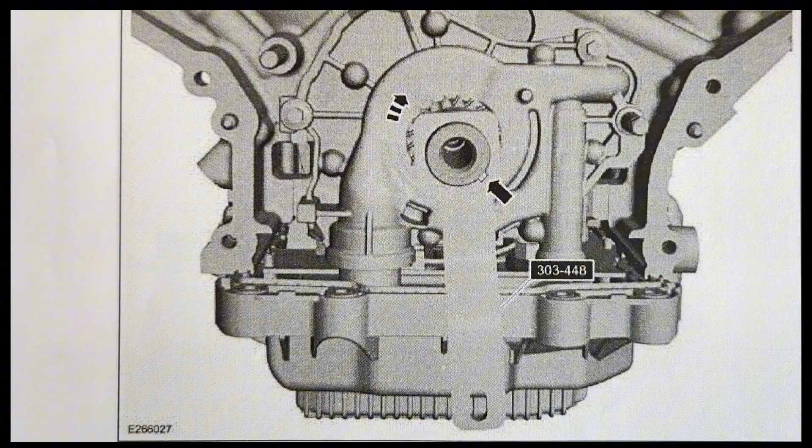Using the special tool, rotate the crankshaft clockwise until the keyway is at the 5 o'clock position.

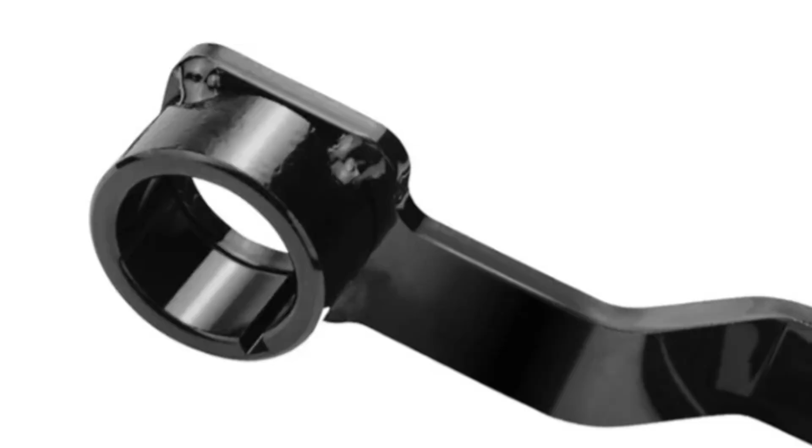That tool is 303-448, and it's called a crankshaft holding tool. The tool from Ford retails for $154.58. The aftermarket version retails for $79.99. The same tool's available through Amazon for $11, which is the one that I bought. But it needs to have the powder coating removed from the part inside that slides over the crankshaft, or else it'll never fit.

Starting with the driver's side cylinder head, assemble the hydraulic lash adjusters onto the spring clips on the camshaft roller followers. Lubricate the camshaft roller follower and hydraulic lash adjuster assemblies with clean engine oil. Install the camshaft roller follower and hydraulic lash adjuster assemblies.

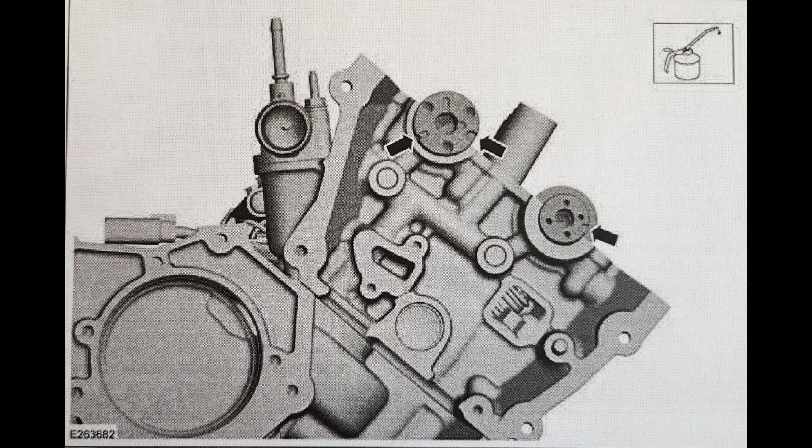Then install the intake and exhaust camshafts in the neutral position and align the D slots as shown in the illustration.

Install the camshaft bearing caps and bolts, but don't tighten them at this time. Install the front mega cap and bolts. Do not tighten at this time as well.

Following the torque sequence shown, you're now ready to torque all the cap bolts, starting at stage 1 at 53 inch-pounds, and then stage 2, turning each one 45 degrees.

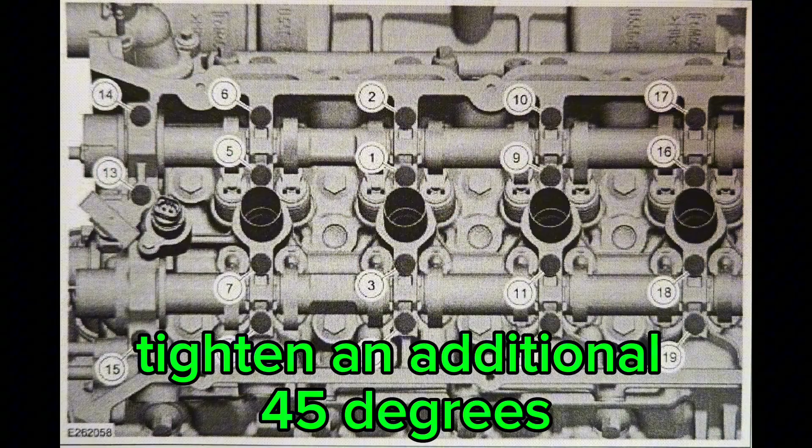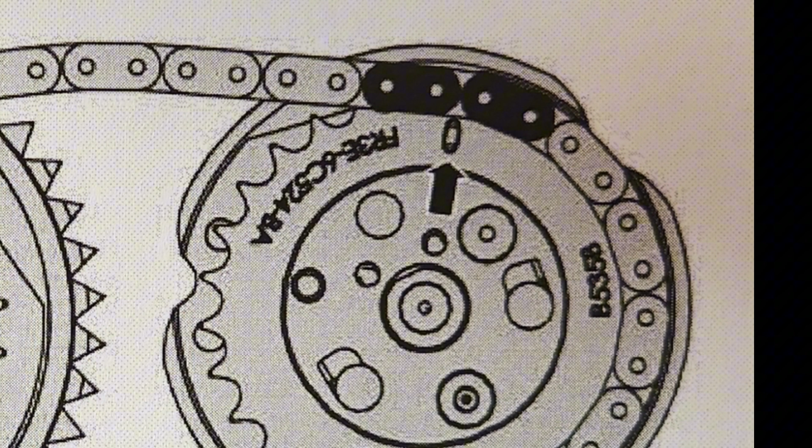Position the secondary timing chain onto the VCT assemblies. If you're using cam lockouts, the procedure is still the same. Align the colored links on the secondary timing chain with the timing marks on the VCT assemblies as shown in the illustration. The timing marks on the intake VCT assembly should line up between the two consecutive colored links. The timing mark on the exhaust VCT assembly should align with the single colored link.

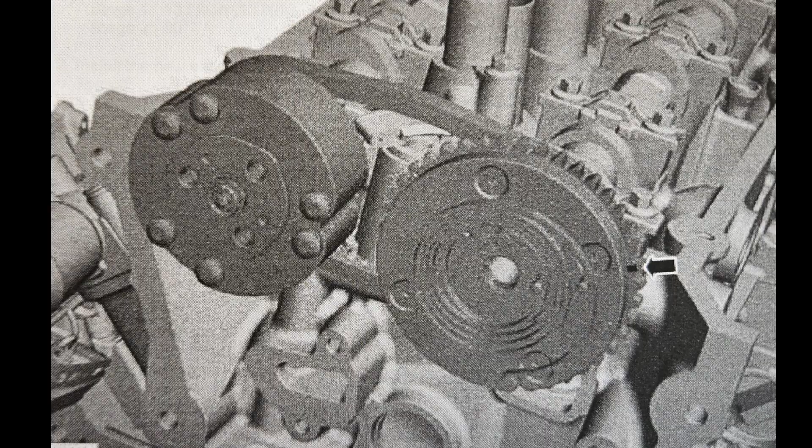Install the VCT assemblies and the secondary timing chain onto the camshafts with the timing mark in the position shown in the graphic. It may be necessary to rotate the exhaust camshaft slightly using a wrench on the flats of the camshaft to seat the VCT assemblies onto the camshaft.

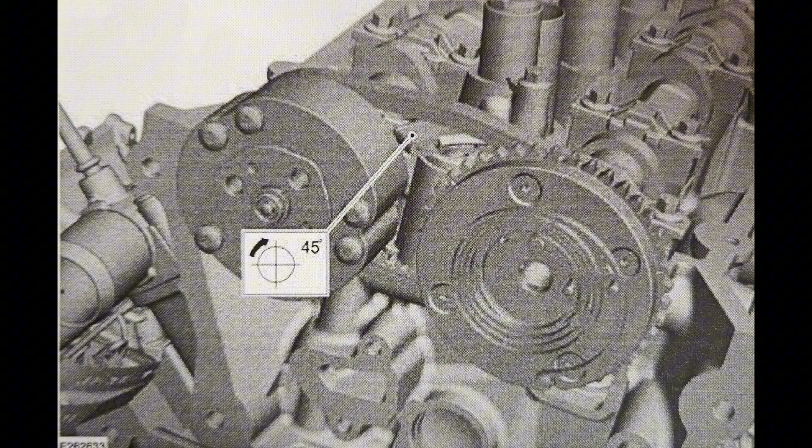Rotate the secondary timing chain tensioner clockwise 45 degrees so the ramped area is facing forward, and fully seat the VCT assemblies onto the camshafts. If the secondary timing chain is not centered over the tensioner, reposition the VCT assemblies until they're fully seated on the camshafts. Use a wrench on the flats of the camshaft to hold the camshafts in position while tightening the VCT assembly bolts.

Install the new intake VCT assembly bolts in the following procedure. Stage 1, torque to 133 inch-pounds. Then stage 2, rotate them another 90 degrees.

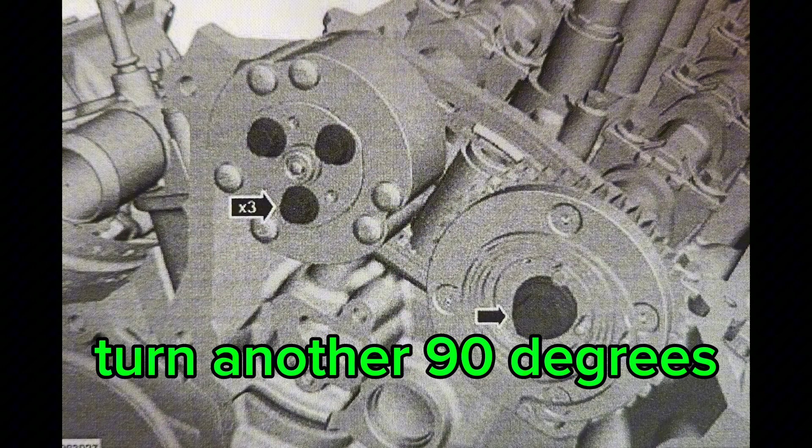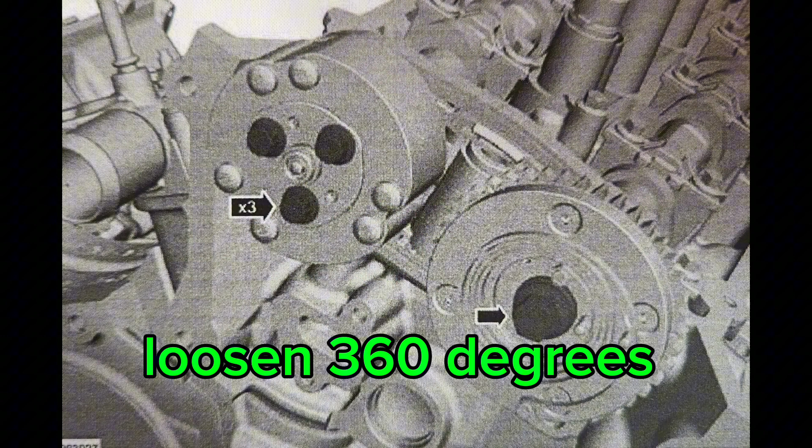Install the new exhaust VCT assembly bolt and torque as follows. Stage 1, 30 foot-pounds. Stage 2, loosen 360 degrees. Stage 3, 30 foot-pounds. Stage 4, rotate the bolt 90 degrees.

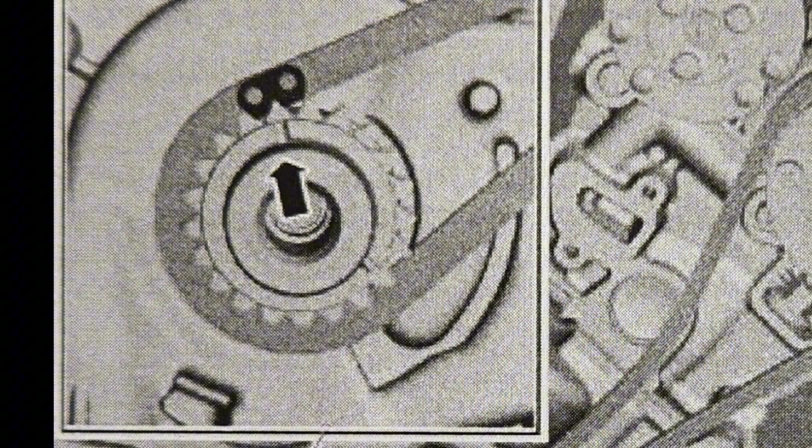Install the left hand or driver's side timing chain. Align the colored link on the timing chain with the timing mark on the left hand VCT assembly. Align the remaining colored link on the timing chain with the timing mark on the crankshaft sprocket.

To install the left-hand timing chain guide, it may be necessary to rotate the crankshaft slightly to provide enough slack to install that guide.

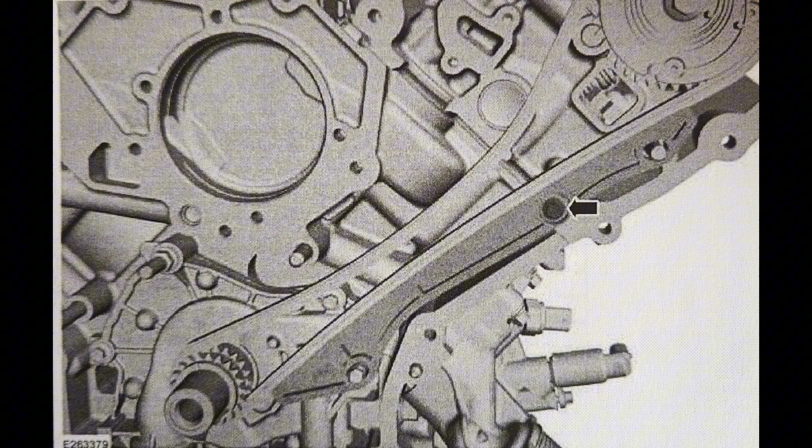If rotating the crankshaft is necessary, be sure to return the crankshaft keyway to the 5 o'clock position after installing the left-hand timing chain guide. Tighten the attaching bolt to 89 inch-pounds.

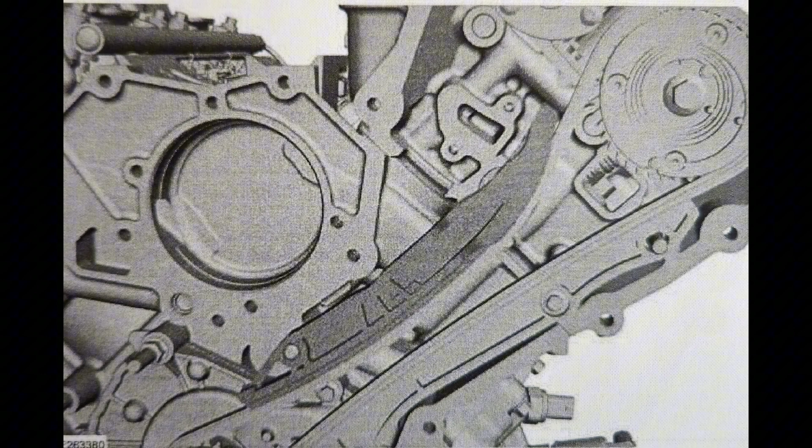When installing the left-hand timing chain tensioner arm, it may also be necessary to rotate the crankshaft slightly to provide enough slack to install it. Always make sure to return the crankshaft keyway back to the 5 o'clock position once doing this.

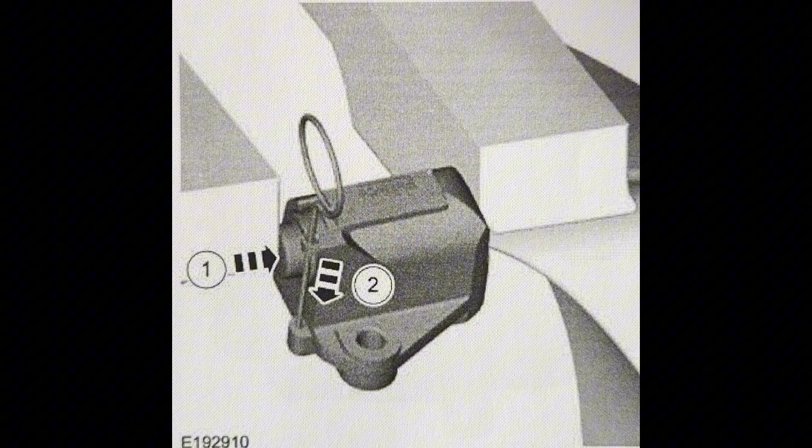Taking the timing chain tensioner plunger, carefully install it in the vise and use a suitable pin in the hole of the tensioner housing to hold the plunger in place during installation.

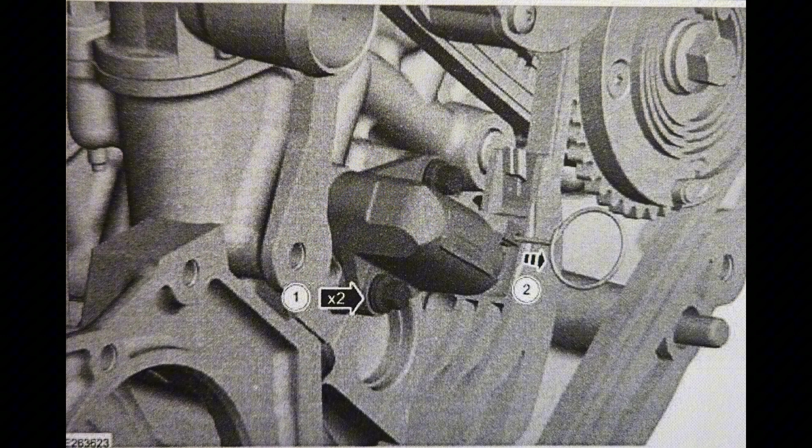Install the left-hand primary timing chain tensioner and bolts onto the engine. Torque as follows: stage 1, 89 inch-pounds. Stage 2, rotate the bolt 25 degrees. Once that's done, remove the holding pin from the tensioner.

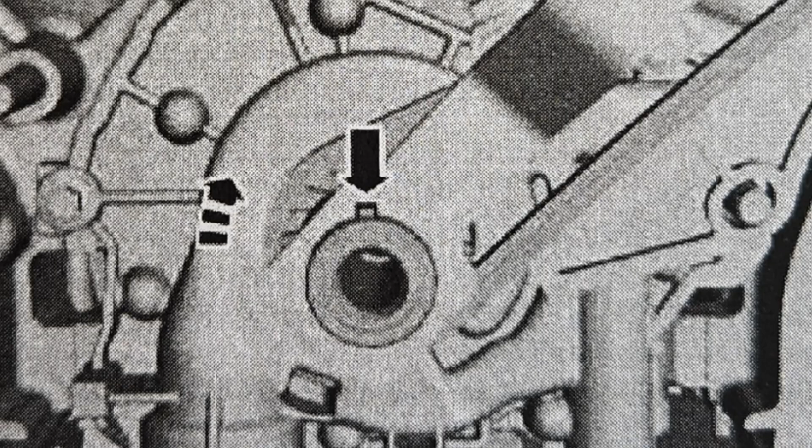Once again, using the special tool, rotate the crankshaft clockwise until the keyway is at the 12 o'clock position. Once the cylinder head is installed, install the intake and exhaust camshafts in a neutral position and align the D slots as shown in this illustration.

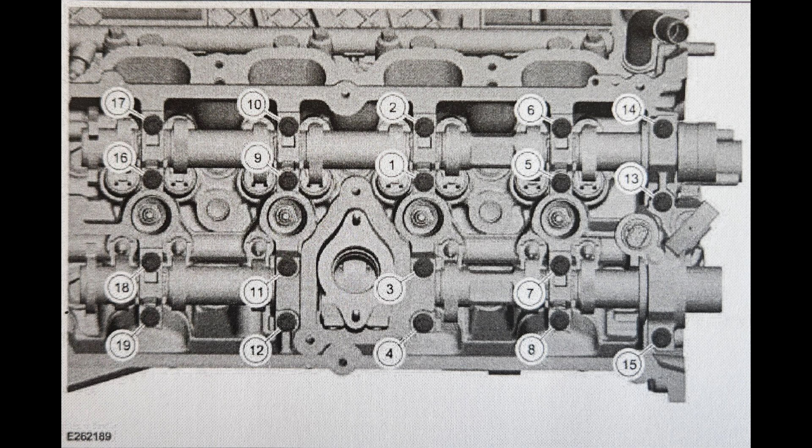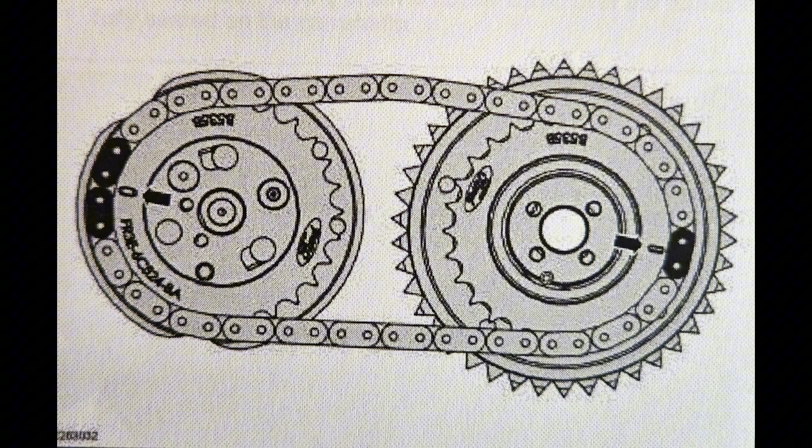Position the secondary timing chain onto the VCT assemblies. Align the colored links on the secondary timing chain with the marks on the VCT assemblies as shown in this illustration. Install the VCT assemblies and the secondary timing chain onto the camshafts with the timing mark in the position as shown in this illustration.

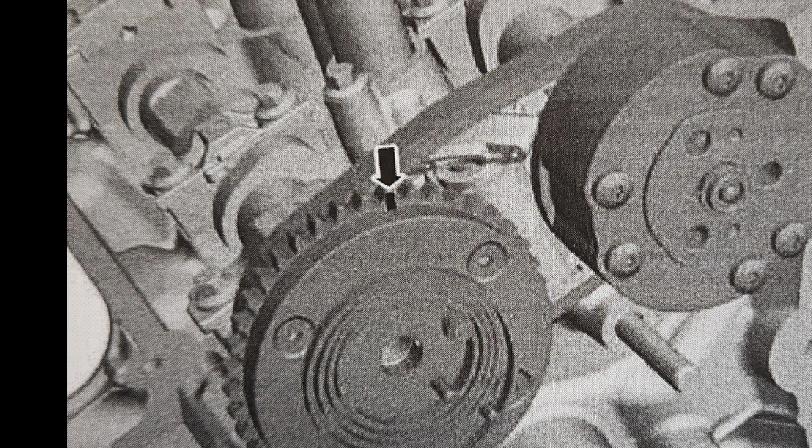It may be necessary to rotate the exhaust camshaft slightly using a wrench on the flats of the camshaft to seat the VCT assemblies onto their camshafts.

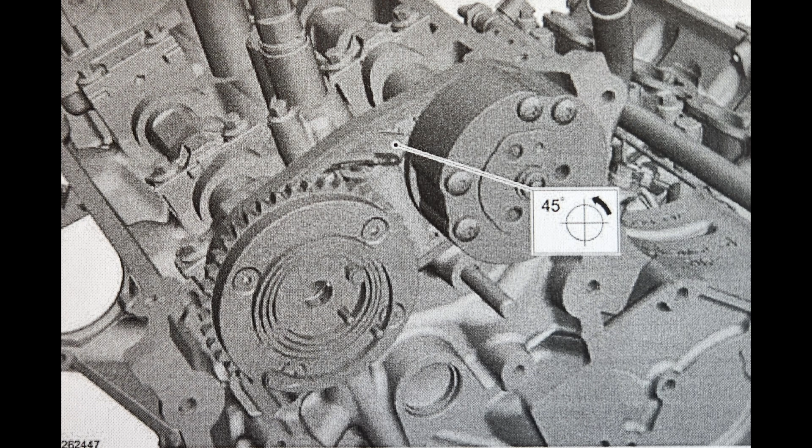Rotate the secondary timing chain tensioner counterclockwise 45 degrees so the ramped area is facing forward, and fully seat the VCT assemblies onto their camshafts. If the secondary timing chain is not centered over the tensioner, reposition the VCT assemblies until they are fully seated on the camshafts. Use new bolts to install the VCT assemblies to the camshafts.

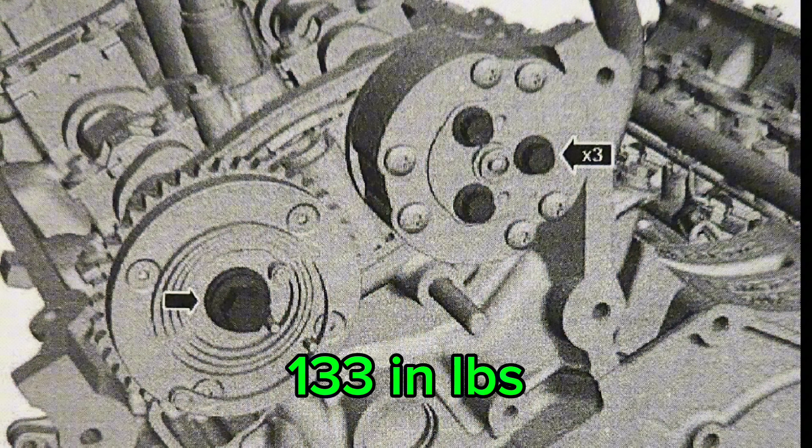Install the new intake VCT assembly bolts. Stage 1, torque to 133 inch-pound. Stage 2, rotate that bolt 90 degrees.

Install the new exhaust VCT assembly bolt. Tighten it in the first stage, 30 pound-feet. Stage 2, loosen 360 degrees. Stage 3, tighten to 20 pound-feet. Stage 4, rotate that bolt 150 degrees.

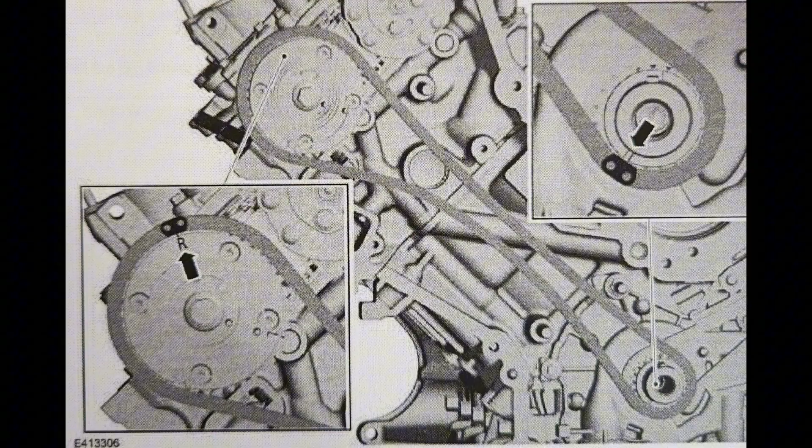Install the right-hand timing chain. Align the colored link on the timing chain with the timing mark on the right-hand VCT assembly. Align the remaining colored link on the timing chain with the timing mark on the crankshaft sprocket.

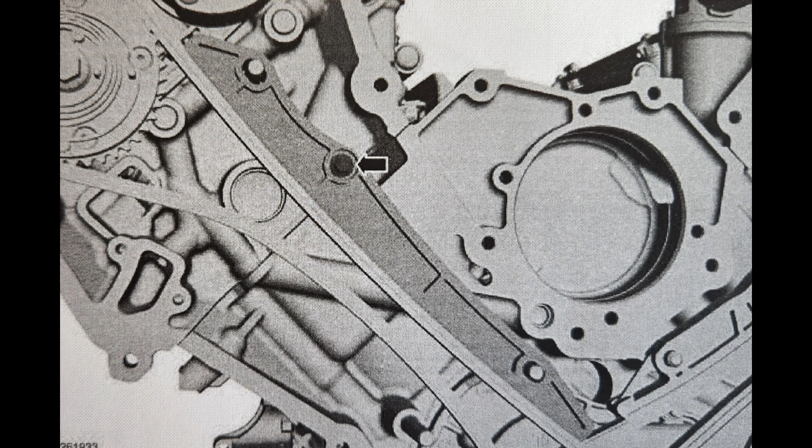It may be necessary to rotate the crankshaft slightly to provide enough slack in the chain to install the right-hand timing chain guide. Always return the crankshaft keyway back to the 12 o'clock position after installing that right-hand timing chain guide. Torque the timing chain guide bolt in 2 stages.

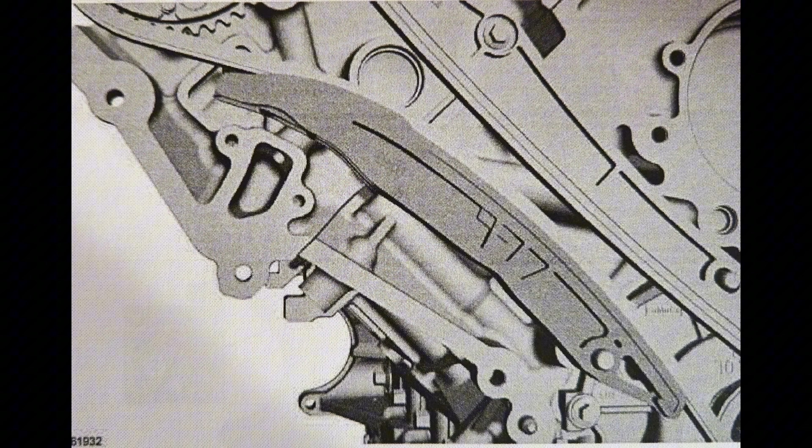First stage, 89 pound-inch of torque. Stage 2, rotate the bolt 25 degrees. To install the right-hand timing chain arm, it may also be necessary to rotate the crankshaft slightly to provide enough slack. Always remember to return the crankshaft keyway to that 12 o'clock position after installing the right-hand timing chain arm.

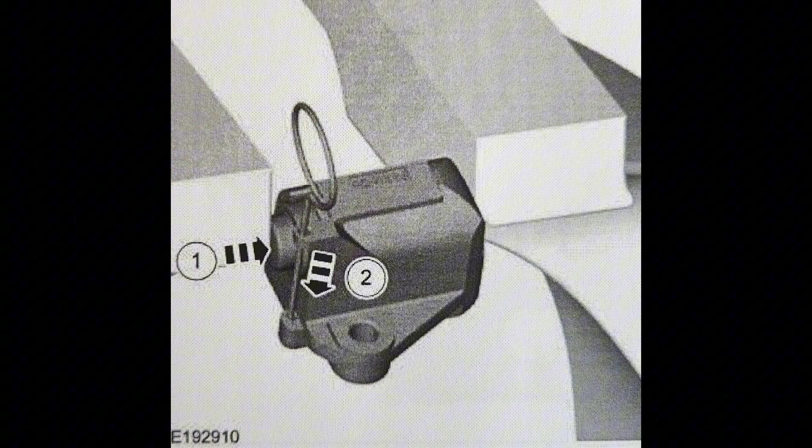Compress the primary timing chain plunger using the edge of a vise. Install a suitable pin into the hole of the tensioner housing to hold the plunger in place during installation.

Install the right-hand primary timing chain tensioner and bolts. Torquing in series as follows: stage 1, 89 pound-inch of torque. Stage 2, rotate the bolt 25 degrees. Remove the holding pin from the tensioner when you're finished.

And that'll do it for putting the timing chains on your Coyote engine. Hopefully that was pretty straightforward. It was right out of the manual online that Ford techs use.

I hope you guys can figure it out from there, try to unravel some of the mystery while trying to put your timing chains on your Gen 3 Coyote engine.